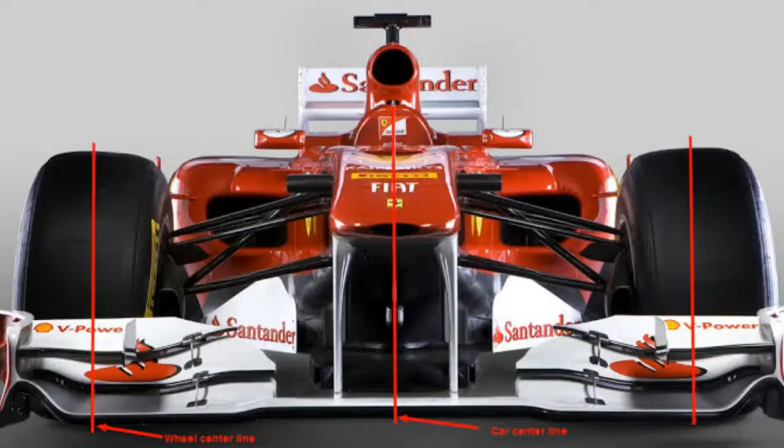In this video I'm going to talk about why Formula 1 cars are using a negative camber in the front end. So let's begin. Formula One cars are designed to have negative camber in the front. It has a magnitude of about 1 to 2 degrees and it has very good effects as well as bad. It will provide better benefits during cornering, as well as there will be a bad effect when we go for higher speeds in straight lines.

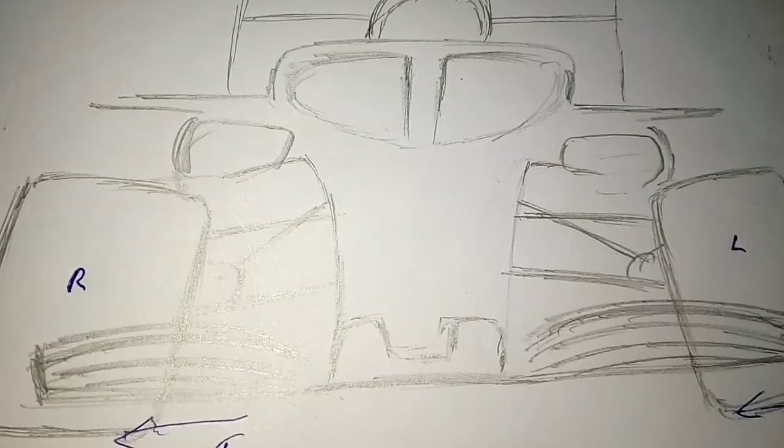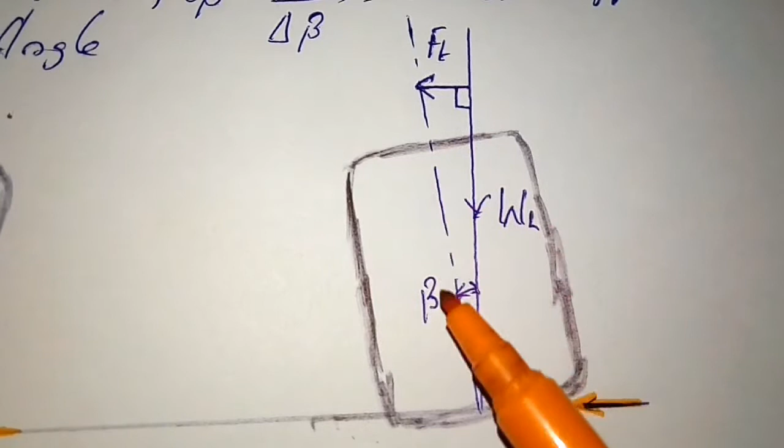So let's look. Camber angle is the tilt of the wheel from the vertical, or the inclination that is made by the wheel plane from the vertical. As you can see here, this is the vertical line and this is the wheel plane, and the wheel plane is inclined from the vertical. So this is the camber angle, and it is denoted by beta.

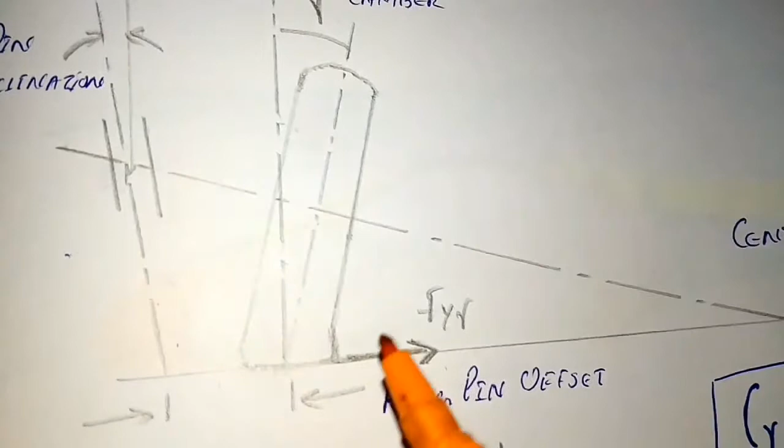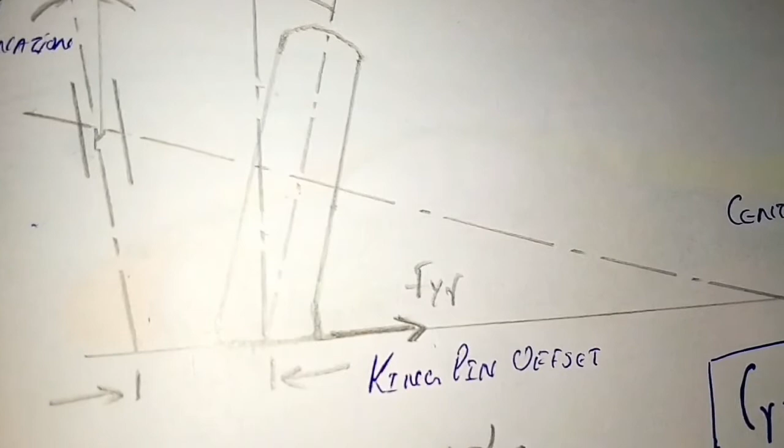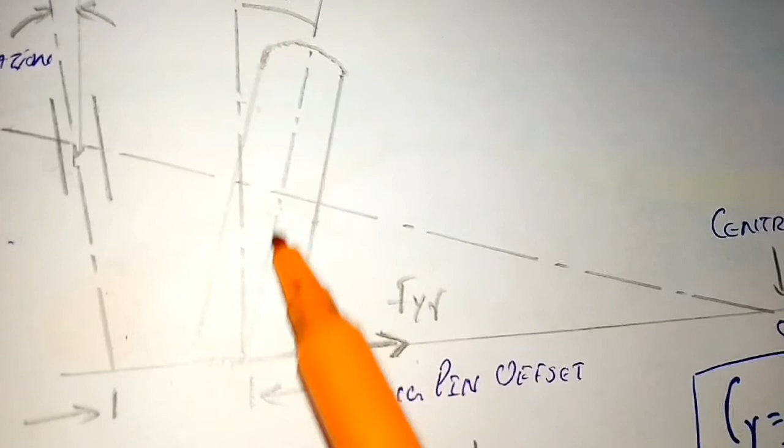Because of this inclination, if we project the axis of the wheel or the tire, it will meet at a point on the ground. So the tire will have a tendency to rotate rather than move forward or rearward in a straight line. So there will be an additional force that is tending the tire to move in a radial manner rather than just a straight direction, and that force is called camber thrust. Camber thrust will always act in a direction towards the wheel plane from the vertical. So here the direction of the camber thrust will be from here to here, so it will be in this direction.

In the case the car is moving just in a straight direction, the negative camber of the tire will make the contact patch at a particular point only, so there will be a higher temperature region on the inner side of the tire, and there will be more wear. If you don't choose the camber angle wisely, it will lead to unequal or huge wear and tear in the tire, and it will negatively affect the life of the tire.

So due to the negative camber, as I already said, there will be a camber thrust, so it will act in a direction towards the wheel plane. This is the vertical line, and the wheel plane will be in this direction. So on this side, the camber thrust will act in this direction, as you can see. And for the left tire, the camber thrust will act in this direction.

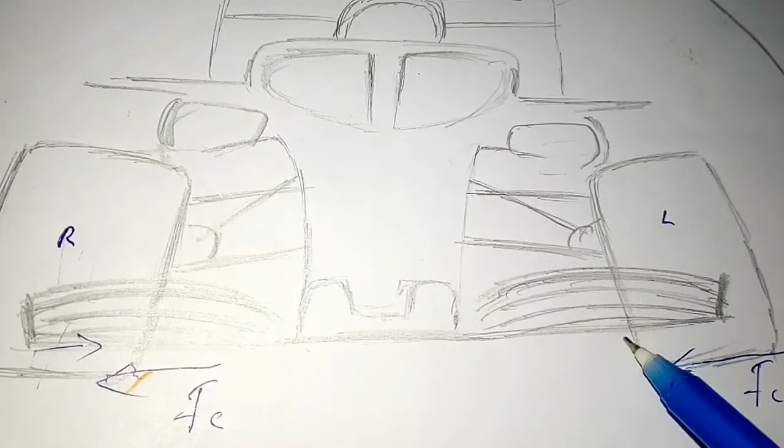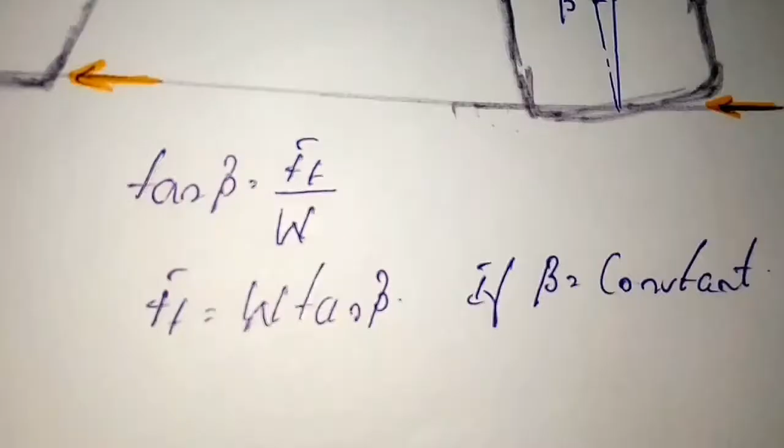The camber thrust is dependent on two things: one is the vertical load, which is the load of the vehicle distributed towards the tire, and the second one is the camber angle. Camber thrust is defined as the product of the tangent of the camber angle and the weight of the vehicle that is distributed towards the tire.

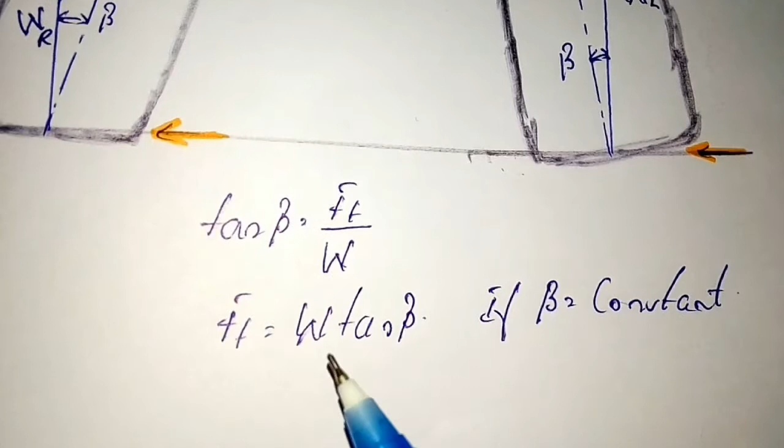So the camber thrust will increase when the load increases, and it will also increase with respect to the increment in the camber angle. This means that if you are moving in a straight line, there will be equal camber thrust in the right as well as the left tire. So the camber thrust in the left tire and right tire will equalize each other, since both act in opposite directions with equal magnitude, so they will cancel out, and it will provide more directional stability for the vehicle, so it will move forward without any interruption or side thrust.

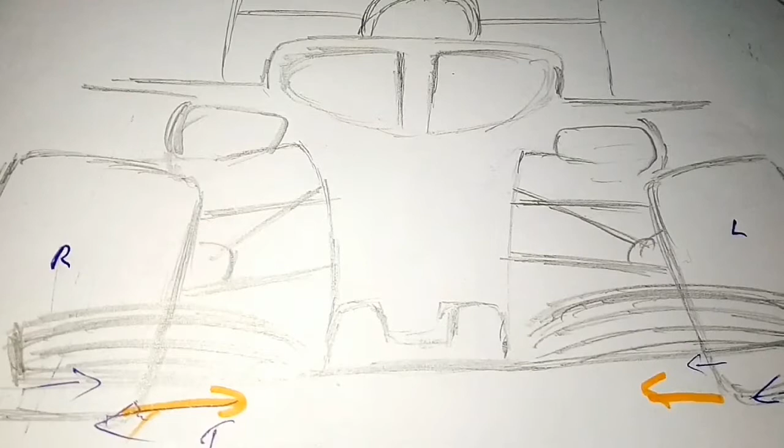But for a Formula 1 car, it has to negotiate lots of corners rather than straight lines, so the car must provide better handling when taking a corner. Consider this car is moving towards a corner in this direction, so the car is taking a rightward turn. So there will be a side force acting in the lateral direction from the right side to the left side, as shown here.

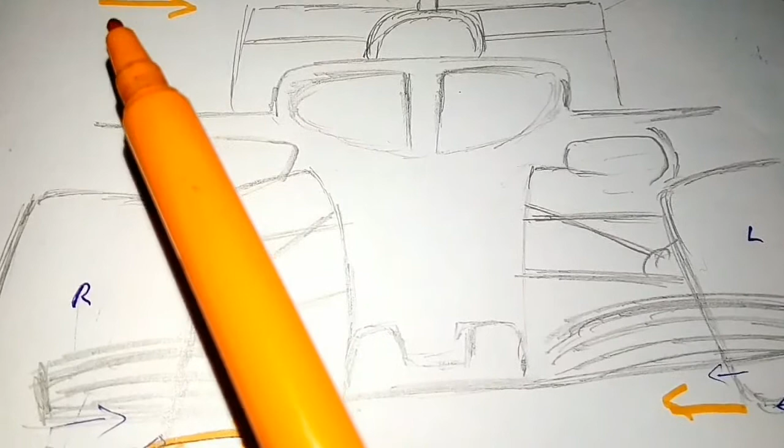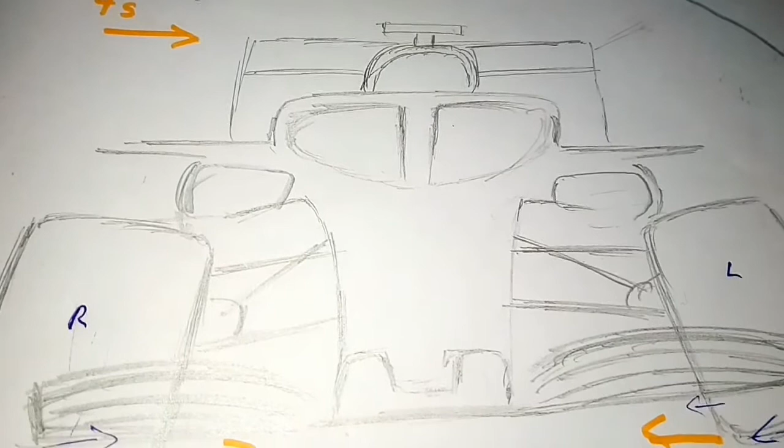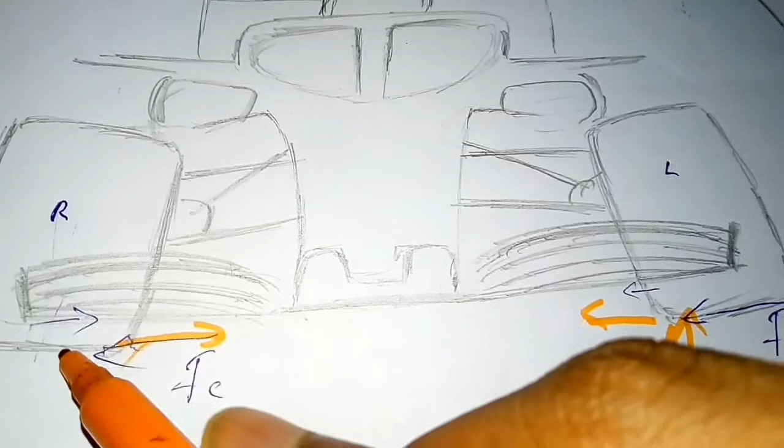So it will lead to a moment known as the rolling moment, which will be in a clockwise direction when we look from the front of the car, so it will be in this direction, actually overturning the vehicle. So the weight transfer will be higher on the left side. The weight transfer in this direction, which is WL, will be high, and the weight on the right side will get reduced. So here WL will be greater than WR, which shows that the camber thrust on this side will get higher compared to the camber thrust on the right side.

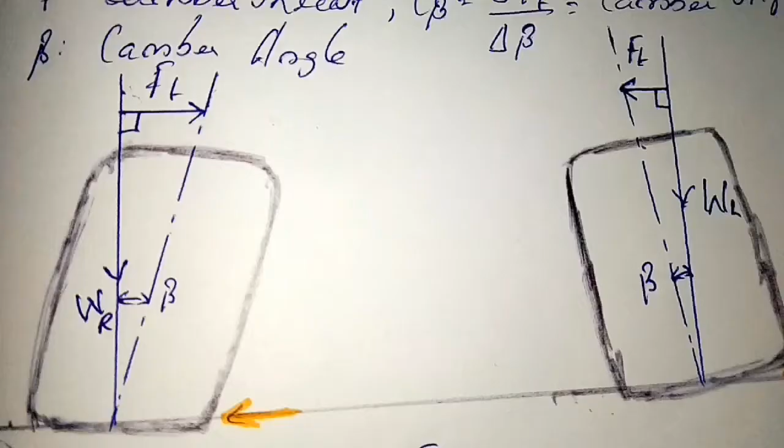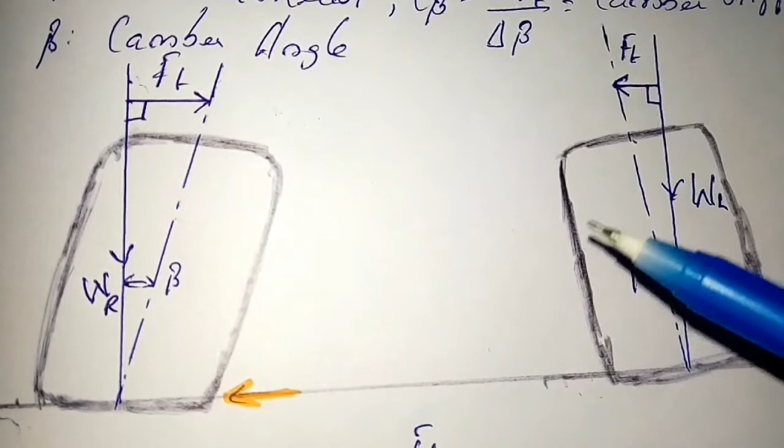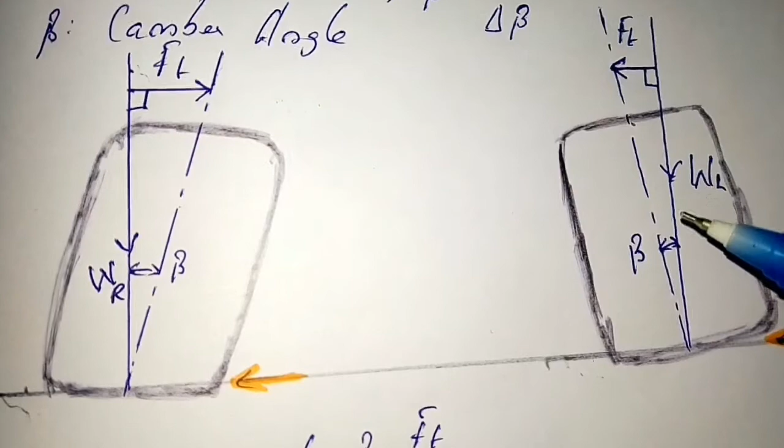To find the magnitude of the camber thrust, we have to use superposition and find a free body diagram. We first draw the magnitude of the weight distributed to the tire, so it will be in a vertical direction, as you can see here. This is the left tire of the Formula 1 car, and this is the right tire, and this is the load acting, WL. It will be a scale model, so the length of this line will represent the weight distributed to the tire, and it is the same here, so this length will represent the weight in the right tire.

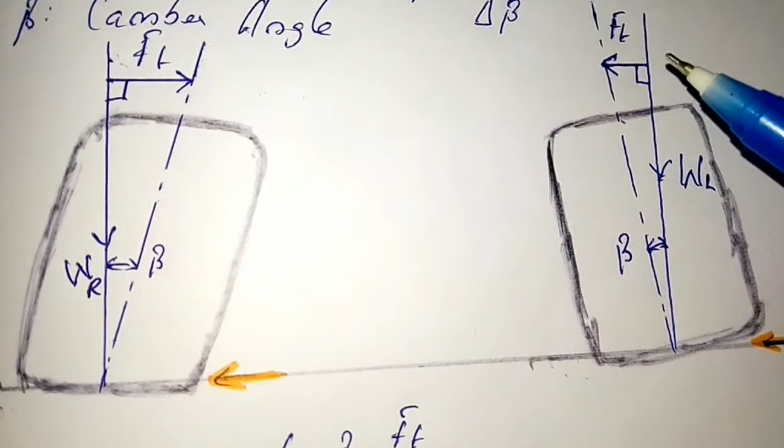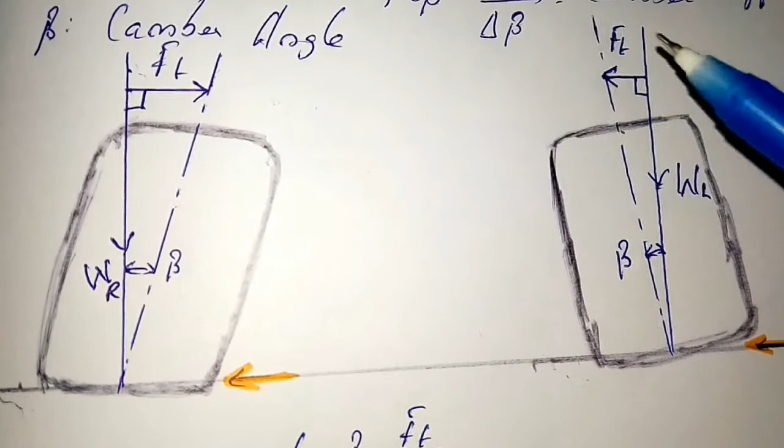For finding the magnitude of camber thrust, we have to draw the wheel plane with respect to the camber angle in the tire. We have to draw a perpendicular, since the camber thrust always acts in a direction towards the wheel plane. So draw a perpendicular from the vertical line through which the weight is actually passing. The length of this line will provide the magnitude of camber thrust.

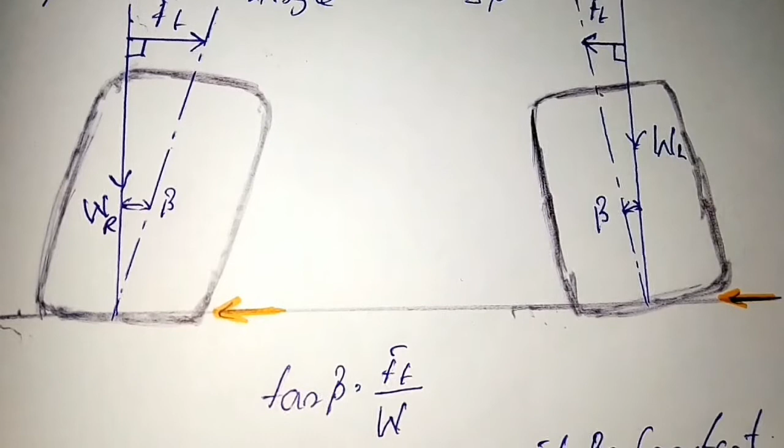You can see the direction of camber thrust in the left tire is in this direction, and in the right it will be in this direction. This shows that when the load W increases, the camber thrust increases, and it will also increase with the increase in the camber angle.

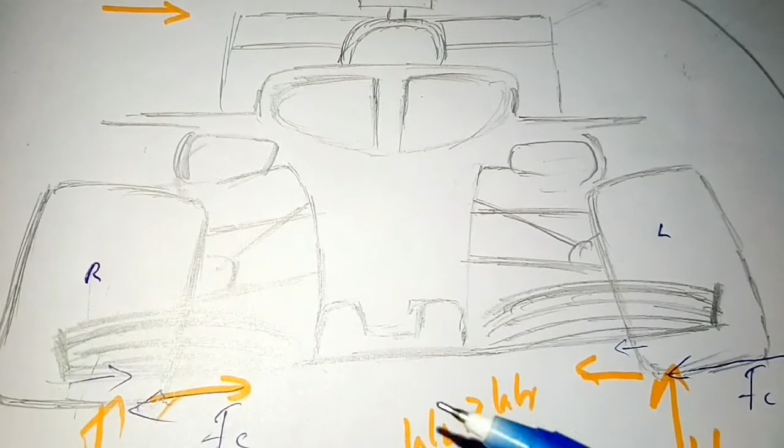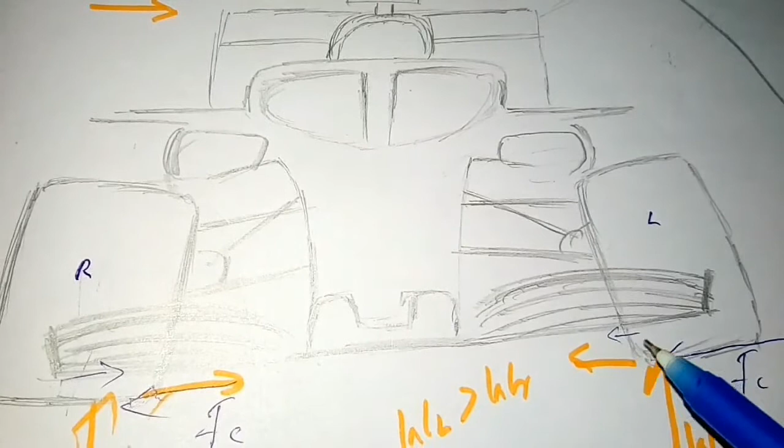There will be an additional force, the cornering force, that helps the vehicle maintain its direction of travel. It will be in an opposite direction to the side force, acting at the contact patch. On the left side, the cornering force and the camber thrust are in the same direction.

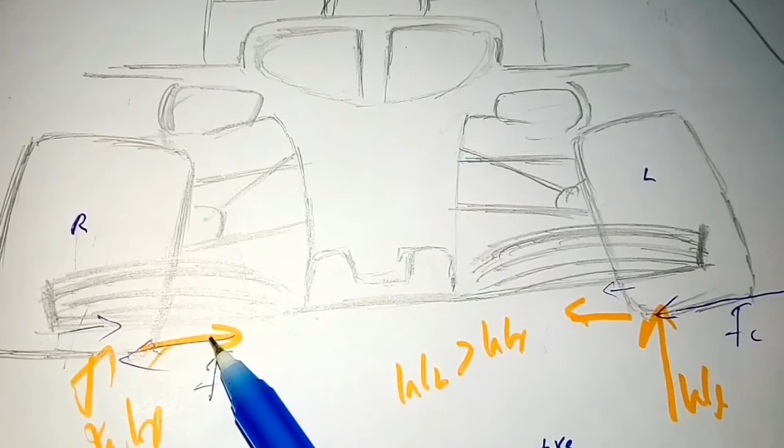So the total lateral force on the left side will be the sum of the cornering force and camber thrust. But on the right side, the cornering force and camber thrust act in opposite directions, because the camber thrust is in this direction and the cornering force is in this direction. So the total lateral force on the right side will be Fc minus Ft, where Fc is the cornering force and Ft is the camber thrust.

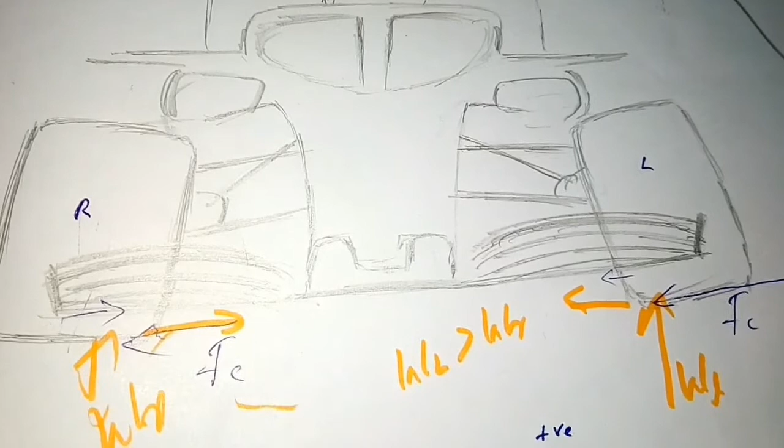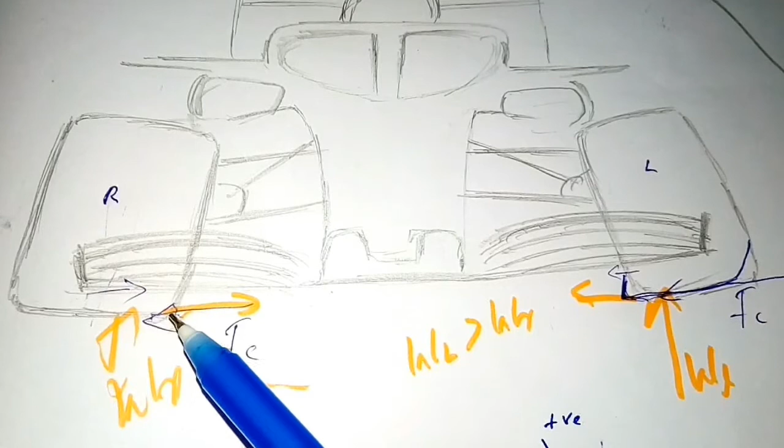So the lateral force on the left tire will dominate when we provide a negative camber in the Formula 1 car tire. It will help provide a better contact patch on the left side tire, which will distort like this, giving better grip. But it has an opposite effect on the right side tire: because of the negative camber, you can only see the contact patch in this corner.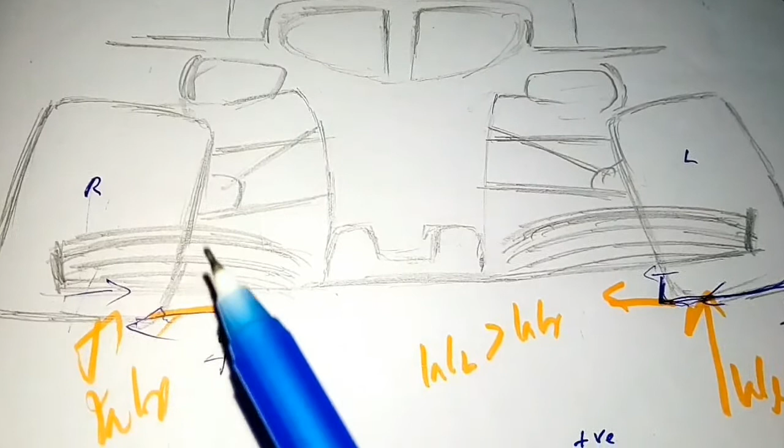Due to the weight transfer also, there will be a lower lateral force, so we get very low traction on the right side tire. So it will always be better to provide a positive camber on the inside tire for better handling, but it is not that simple.

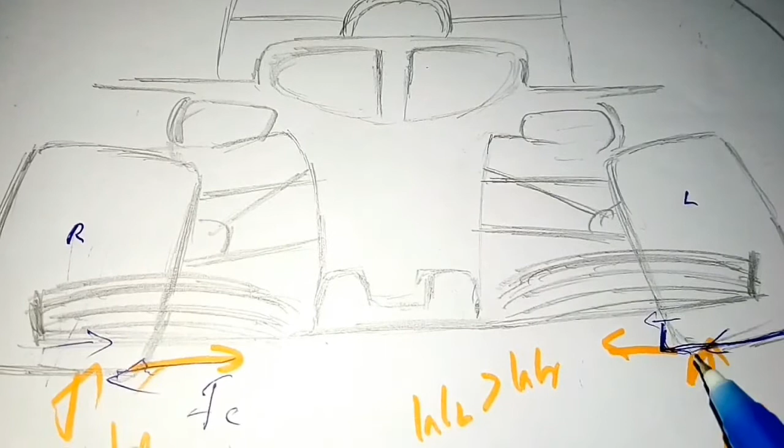But we can see that the weight transfer is always towards the outside tire, so it will actually outweigh this effect, because the more weight that is transferred to the left tire, the more lateral force we have on the left as well, outweighing the effect of low traction on the right side tire.

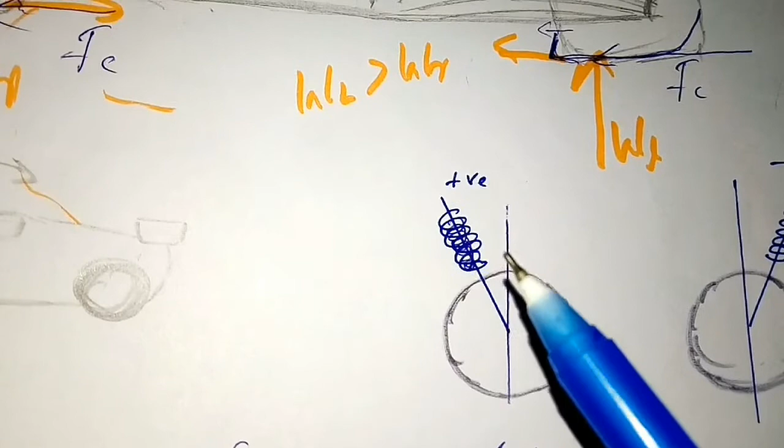But a better selection of caster angle will help us give a positive camber effect, or a little positive camber, on the inside tire. So we get better grip on the inside tire while taking corners, providing better handling. So caster angle will also have an effect on better handling for a Formula 1 car.

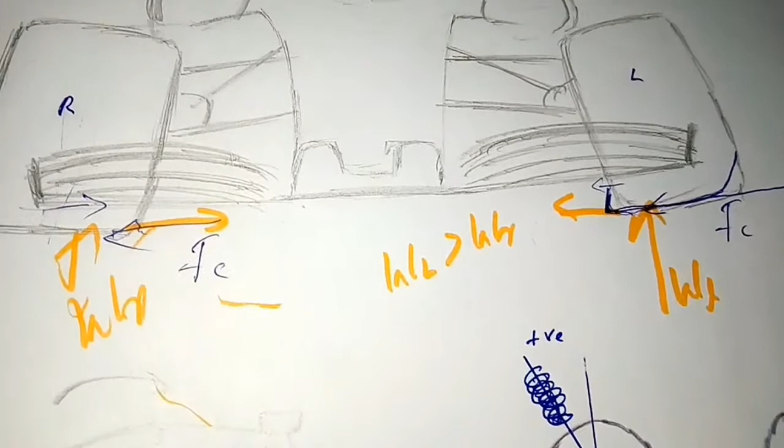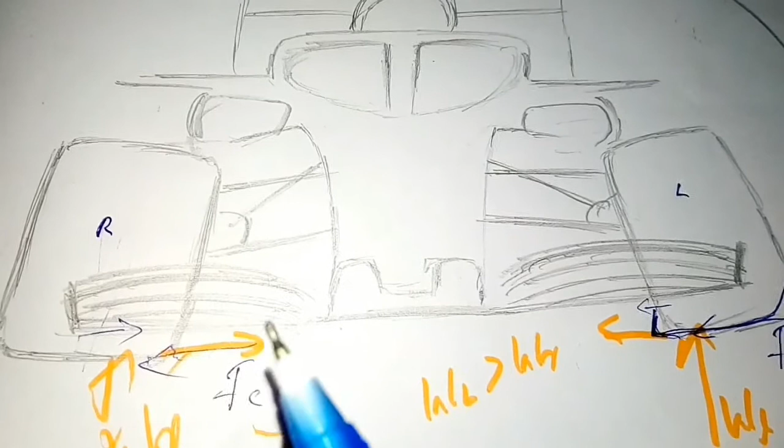So we have to provide better caster, as well as a good negative camber, which has a very big and better effect during handling of a Formula 1 car while taking a corner. All these things will change when we accelerate in a straight line.

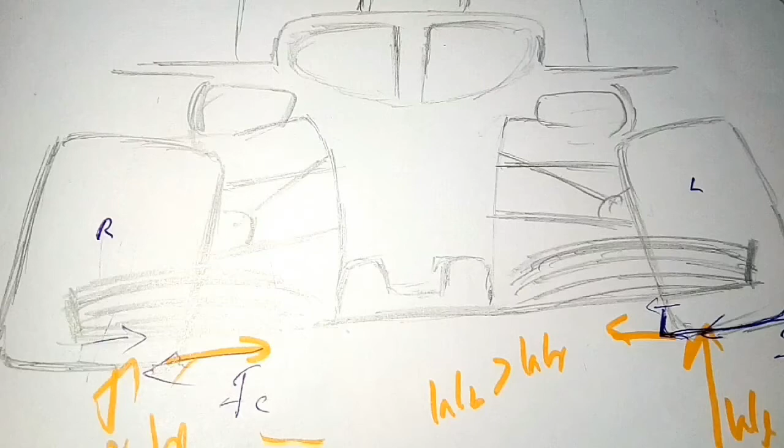So we have very low contact patch because of this negative camber, and we have a neutral or zero camber in the rear tire. We get less handling when going in a straight line with this negative camber. But we have another advantage.

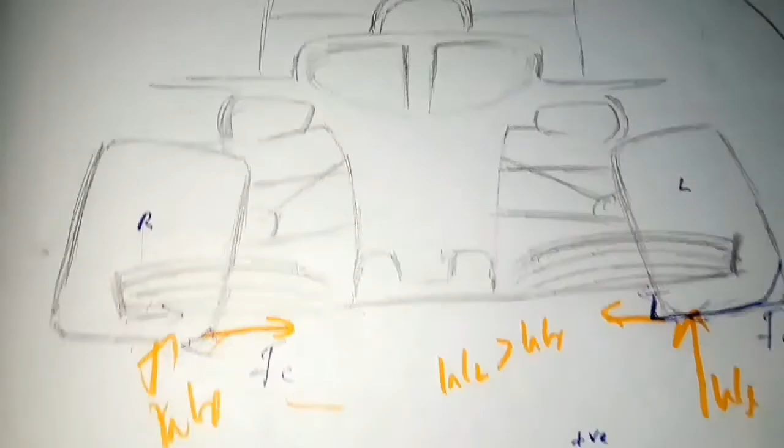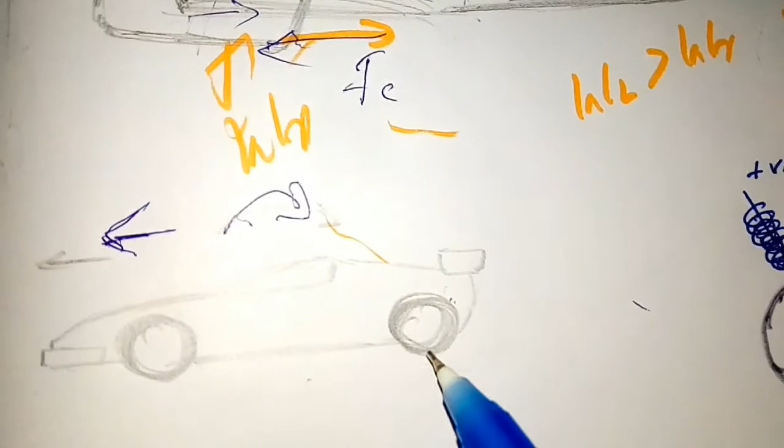When we accelerate in the forward direction, there will be weight transfer like this, so more of the weight will act on the rear tire. So WR will be greater than WF. So there will not be that much effect from providing negative camber.

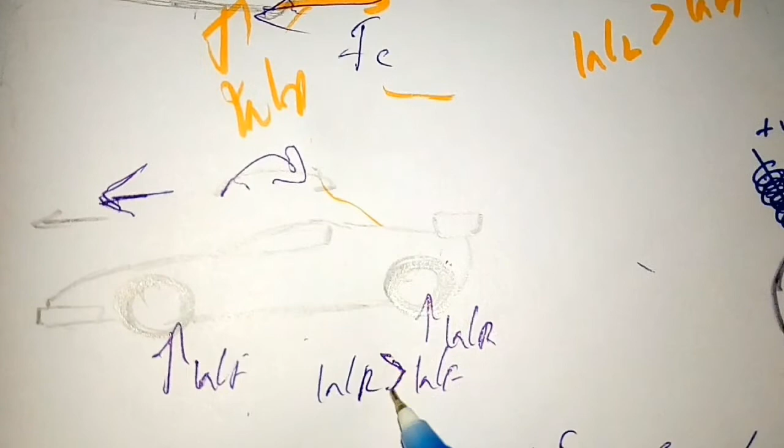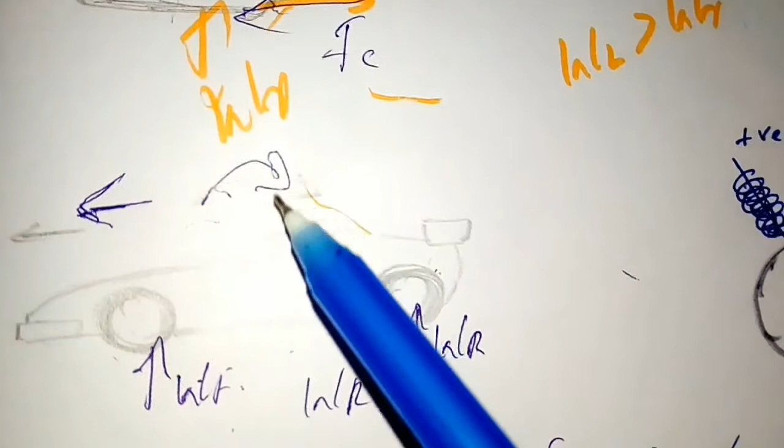So we can partly outweigh the effect due to this weight transfer towards the rear tire, and since we are providing torque to the rear wheel tire, we actually need more traction in the rear tire only, and we have neutral camber in the rear wheel tire, so we get better traction in the straight line also.

Let's summarize. In a cornering event, the total lateral force on the outside tire will be higher in magnitude compared to the inside tire, and the load transfer during cornering will increase the magnitude of camber thrust in the outside tire, which helps provide better tire adhesion and higher contact patch area in the outer tire.

The negative effect of negative camber in a straight line will be outweighed by the weight transfer due to inertia force during acceleration, because more weight will be transferred to the rear tire where we have neutral camber, so there will be better traction in the rear wheel tire and we can transfer the torque very efficiently.

Hope you know the reason for negative camber in Formula 1 cars' tires.